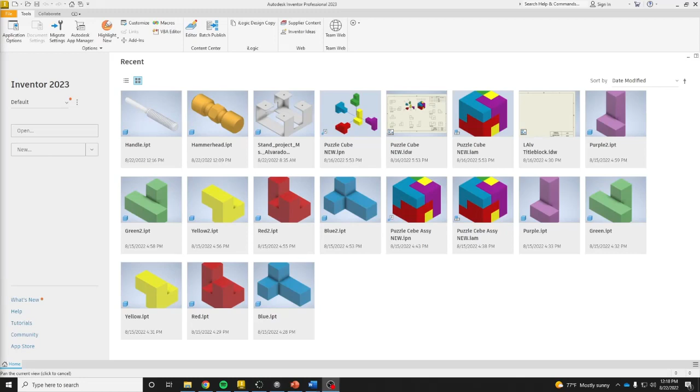Okay guys, in this video I'm going to show you how to create a two-part brass hammer. This hammer is going to be in the regular English system, so let's go to New and click on Standard IPT. From here, we are going to be creating our first sketch on the XY plane.

If we look at the original drawings, we'll notice that this is a symmetrical piece. So since this is a symmetrical piece, we're only going to be drawing half of it.

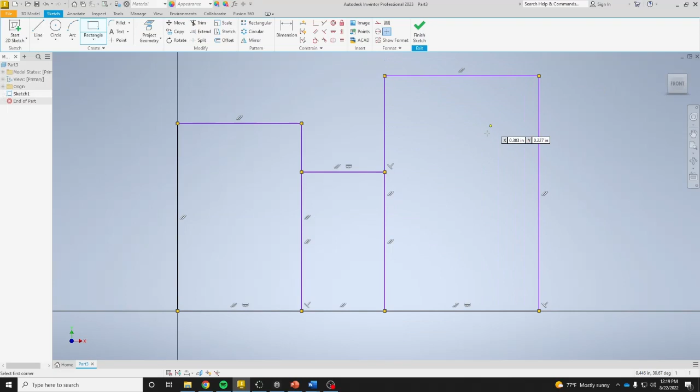I'm first going to be creating three rectangles: 1, 2, and 3. Now I didn't connect them other than at the bottom points. The reason why I did not connect them is because they are all at different heights.

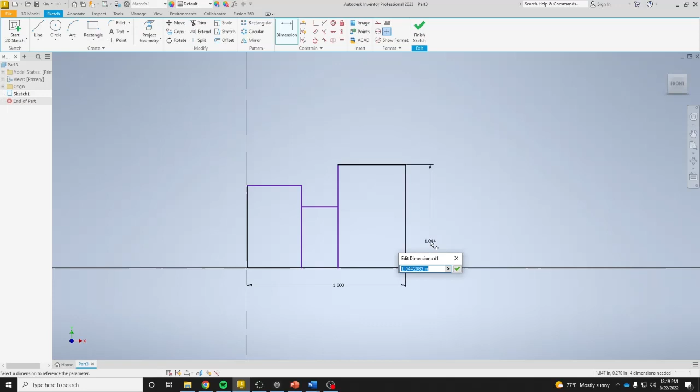The first thing I need to do is dimension the overall width from left to right, or in this case from center to right, which is 1.6. This rectangle on the outside has a diameter of 1 inch, but since we are going to be making a revolution, we're going to divide that in half, giving us 0.5.

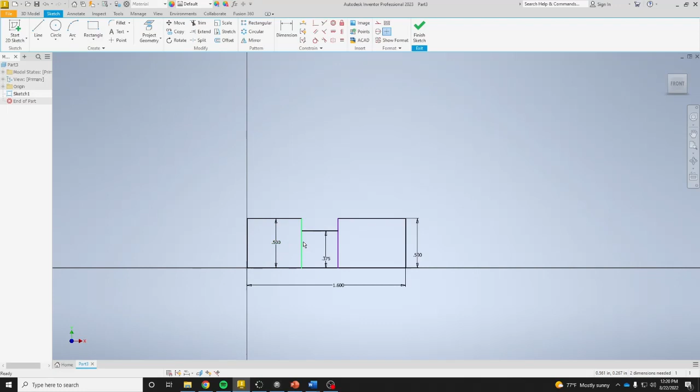This middle rectangle is 0.75 divided by 2, which gives us 0.375. And this section right here I'm going to put at 0.5. Now I know in the drawings you might see this as 0.85, but this is a hexagon, and I will be changing this revolution into a hexagon later, so I'll get to that in a bit.

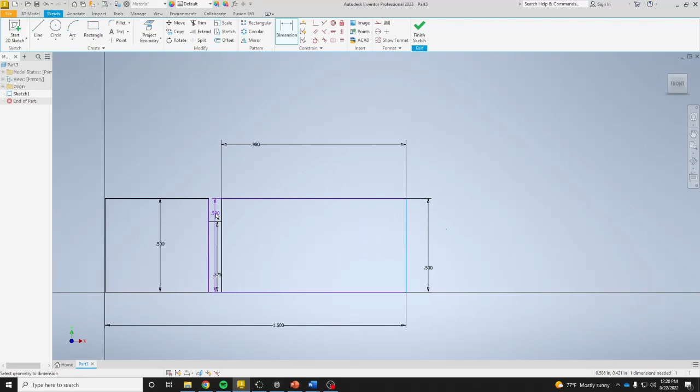Let's go ahead and add our final dimensions from this furthest edge on the outside to this section right here. This is 0.98. And then from here to this edge, this is 1.26.

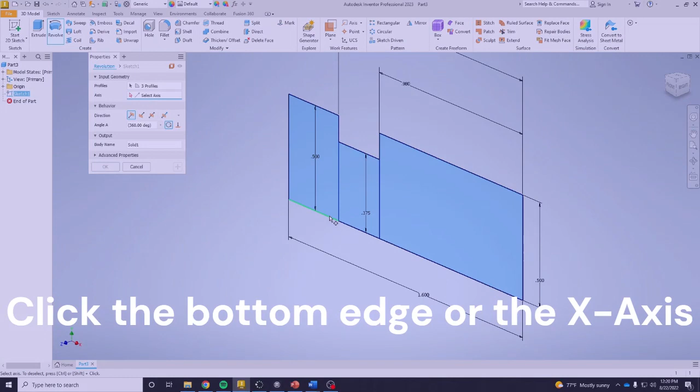Once you have this, go ahead and finish your sketch, and we are going to be revolving. So select all three of your profiles, all three rectangles. Go to Select Axis, click there, and we are going to select this bottom line, and it gives us our revolution.

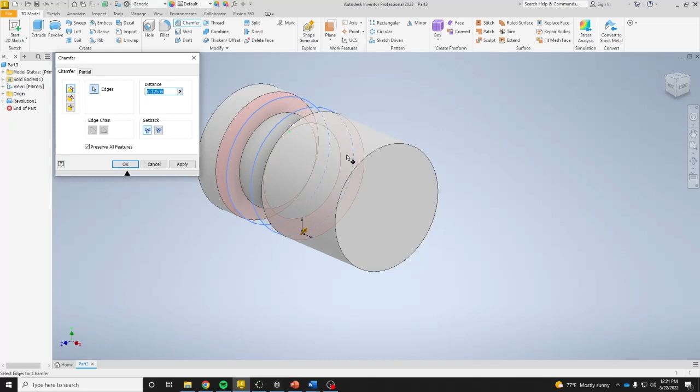Now once you have that, we are going to be adding some chamfers. The chamfers are at 45 degrees and have a depth, or distance, of 0.125. The chamfers go here, here, and here. Go ahead and say OK, and we're almost done with this part.

This section right here should be a hexagon shape, so I'm going to turn to my left side view, and I'm going to create a sketch right here.

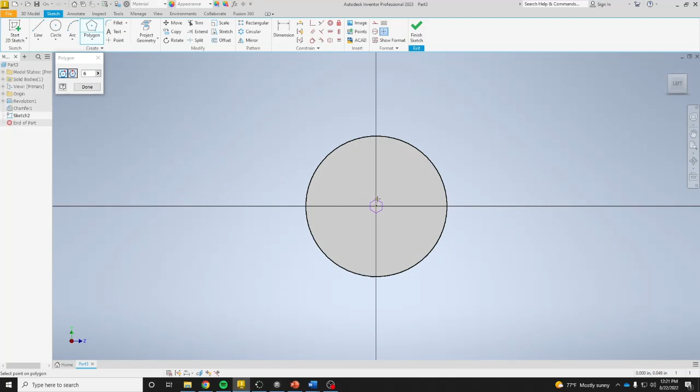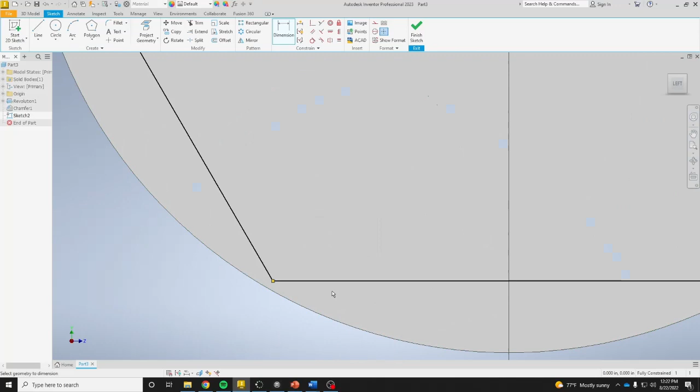Rectangle pull-down menu, and select polygon. From here, I'm going to select the center point, and pull it out to make a polygon, or in this case a hexagon, that is larger than my actual object. I'm going to use my horizontal constraint to make sure this top edge stays flat and horizontal, and that from my top edge to my bottom edge this is 0.85. As you'll notice, all of the points are on the inside of my circle, and that's exactly what I want.

I'm now going to create a regular circle that is larger than everything else, because I'm going to cut out the outside of my hexagon, so that I'm left with just this inner part that is hexagon shaped.

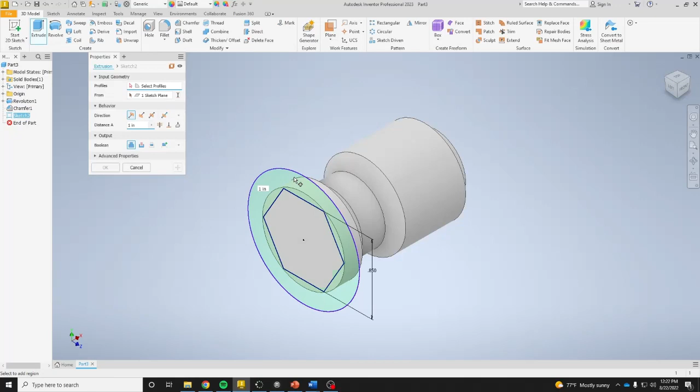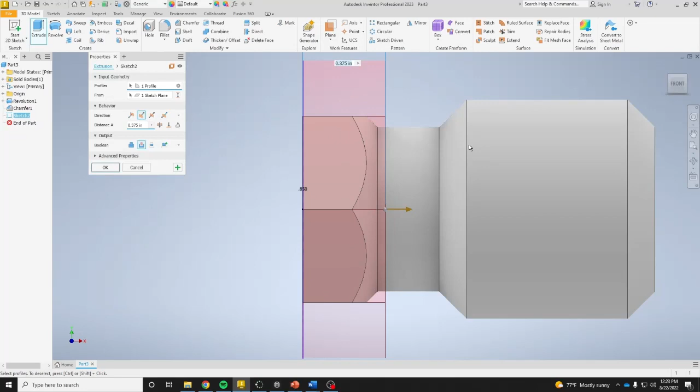So go ahead and do that, and we're going to change the direction of our cut this way. I'm going to look at my front view, grab this arrowhead, and pull it back. As long as you are cutting off more than the hex area here and less than this area here, that's all you need to do.

So once you have that, take a look at it isometrically. This is what you should be left with.

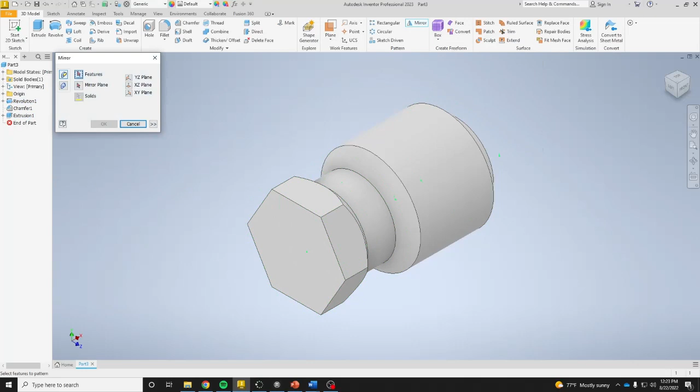Now I did say that this is a symmetrical part, so I'm going to rotate it. I'm going to use my mirror pattern function, and select in the browser bar my revolution, my chamfer, and my extrusion. For my mirror plane, I'm just going to select this part, this face right here, and it shows me a preview of what my mirrored object would look like.

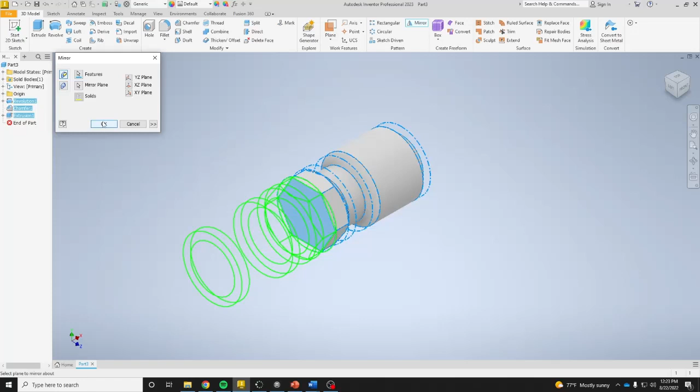Okay, this part is almost done. The last thing I need to add is a hole for the hammer handle to connect to.

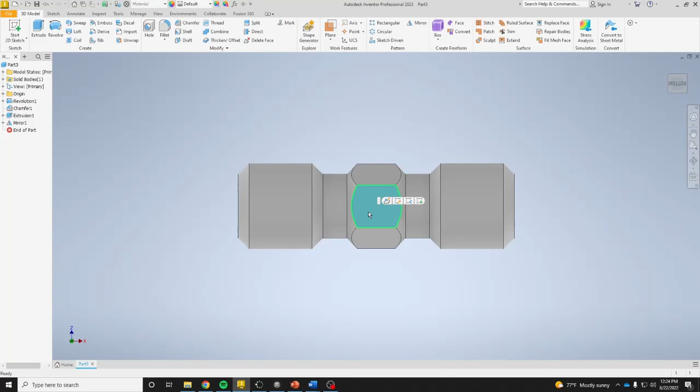So I'm going to go to my view cube and look at the bottom edge or bottom face. I'm going to click here and create a sketch. From here, I'm going to click on point and place that point right in the center of my object. That's all I need to do, and I'm going to click Finish Sketch.

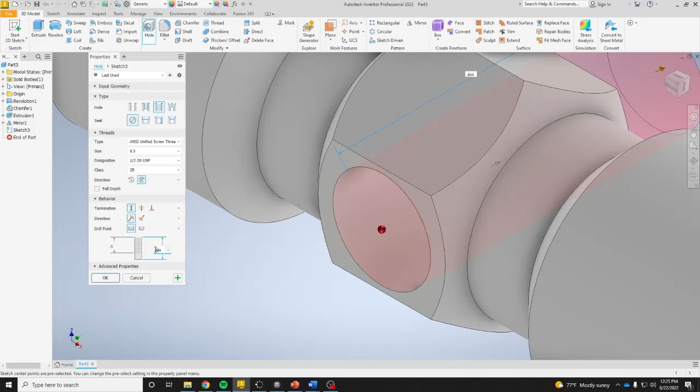I now need to add a hole, so I'm going to click on Hole, and make sure that this hole is a threaded hole with no seat. My threaded hole size is going to be 0.5, so I'll scroll down and find 1/2 20 UNF. Once you have that, enter in the thread depth, which is 0.5, and my actual hole depth is going to be 0.625. Once you have that, say OK, rotate it, and there is our final part.

I just need to change this from the generic material that it is over into brass soft yellow. Once you have that, you can go ahead and save it.

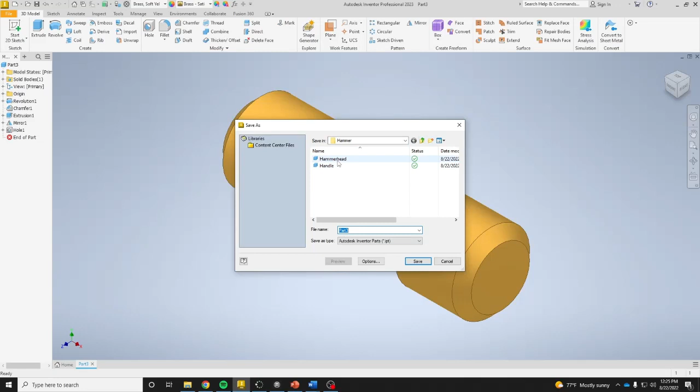I have created a new hammer folder, and in there I have my hammer head, and now I'm going to create my hammer handle.

So go to New and select a standard IPT. The hammer handle is relatively simple, and we're going to be starting on the XY plane. From here, we're going to create two rectangles, a rectangle here and a rectangle here.

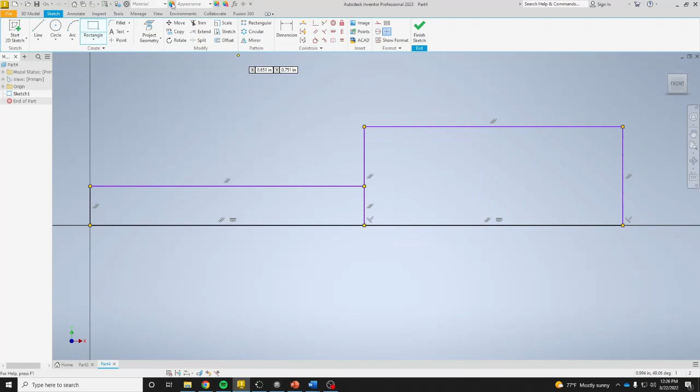I'm going to be adding my dimensions from left to right. This hammer handle is 6.98 inches long. The grip is going to be 3.883.

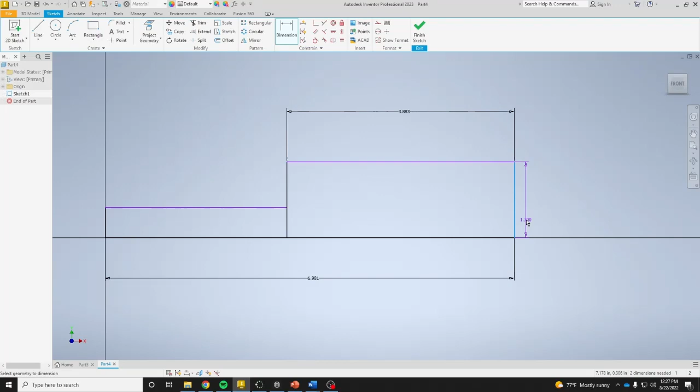Once you have that, then we're going to add our diameters. Remember that we are creating a revolution, so we only have to enter in half of our diameters. The diameter of our handle grip is 0.85, and we are dividing that by 2. And the shaft where the hammer head attaches to is going to be 0.259.

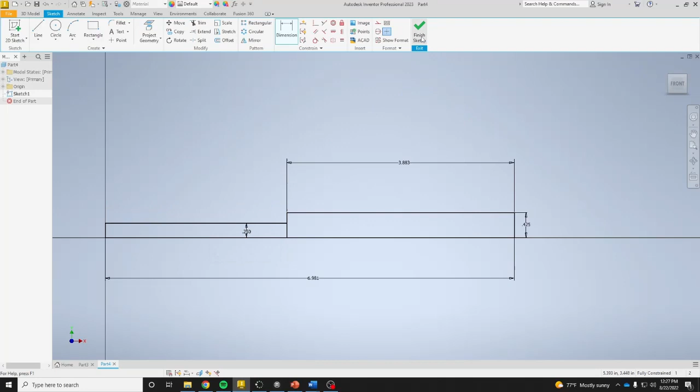Once you have that, finish your sketch, and we are going to revolve. Select both rectangles, and your axis is going to be that bottom edge, and say OK.

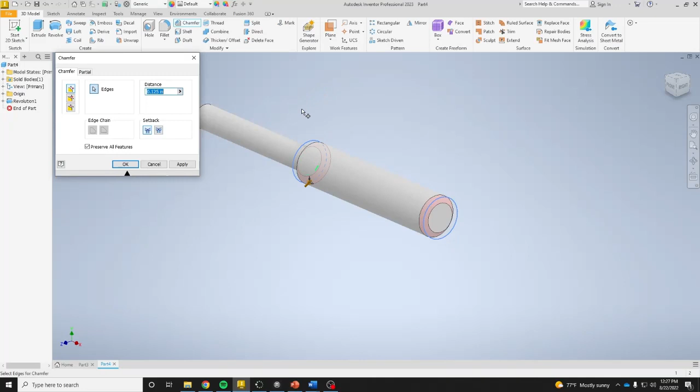Now that you have this, we are just going to add plain chamfers to here and here. Select Apply. Once you have that, we're going to add another chamfer, but this chamfer is going to be 0.035, and say OK. So we now have 3 chamfered edges, and we are almost done.

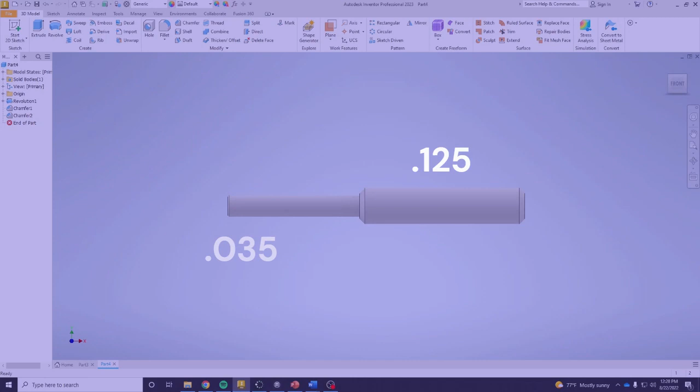Now we need to add the grip. We are going to be creating a new sketch right in the middle of this plane, or right in the middle of this hammer. So we need to go to the plus sign next to origin and choose our XY plane.

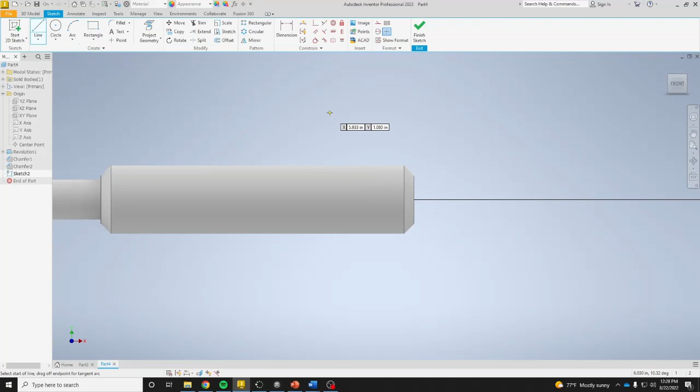I'm going to be creating a triangular cutout. So all I need to do is draw a triangle. Doesn't matter the size, as long as it looks like this. I'm going to use my vertical constraint to lock the point of my triangle to the center point of the flat edge of the triangle. And I'm going to dimension my triangle angle to be 60 degrees.

Once you have that, we can now go ahead and add dimensions of where this triangle is going to be located. 0.292 from the outside edge to this point, this is going to be 0.292. If your triangle does something like this, all you have to do is just drag it up, find the end, and drag it up, and you'll be okay.

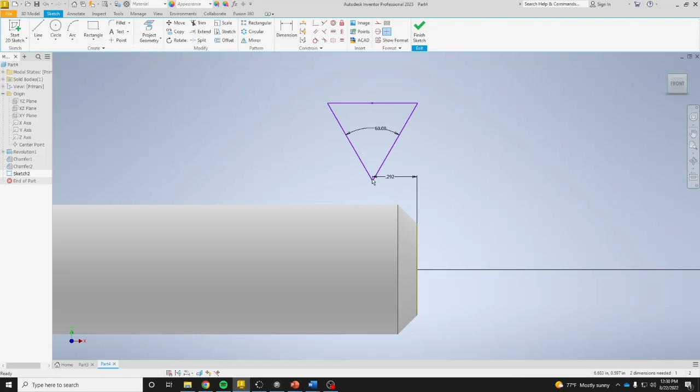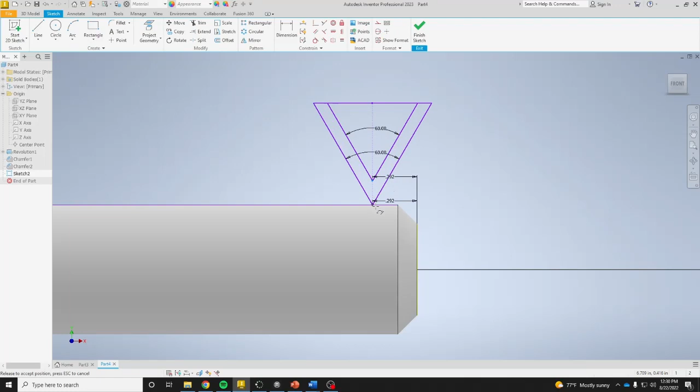The next thing we have to do is show where this point connects to the inside of this grip. Before we can do that, we have to use Project Geometry. So I'm going to click Project Geometry and select this top line. Right click and say OK. I'm going to grab the bottom of my triangle and move it below that yellow line that we created. Next, I'm going to dimension its depth.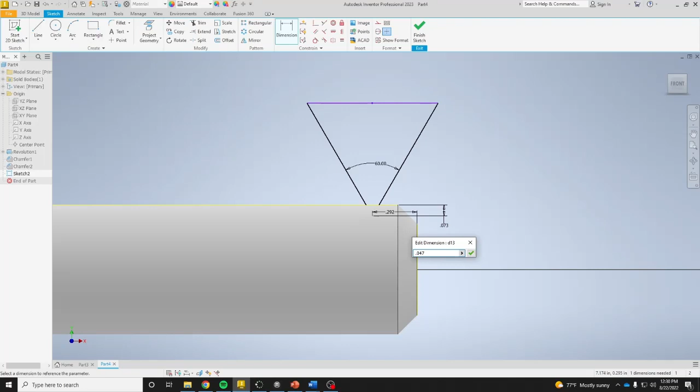All I have to do is find where that point is and add the dimension of 0.047. Once you have that, go ahead and finish your sketch.

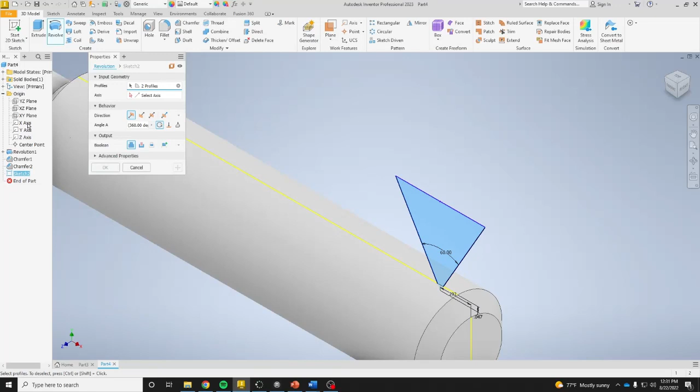We are going to be revolving this cutout, so I'm going to make sure that I select my entire triangle with the point included, and we are revolving around the x-axis. Now instead of adding this, we're going to be cutting it away so that we end up with something that looks like this right here.

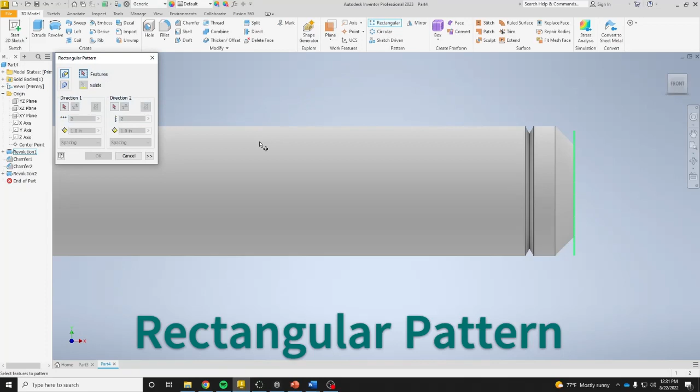We are now going to use our rectangular pattern. So click on rectangular pattern, choose revolution 2. The direction is going to be the x-axis. If we look, it's going to send it in the positive x direction. We want to flip it so it's going into the actual hammer handle. We are repeating this pattern 20 times with a spacing of 0.173.

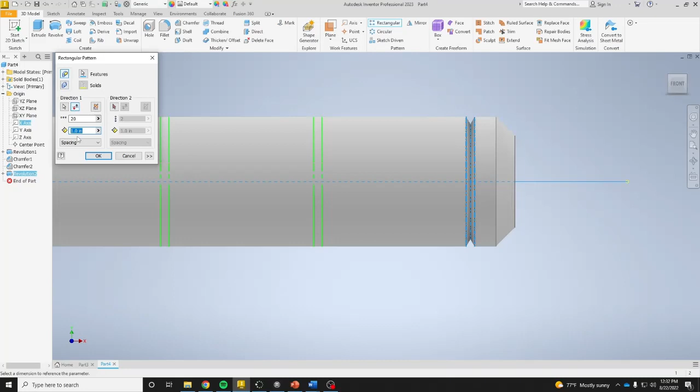You can go ahead and look at the preview of what is going to happen. If you're satisfied, go ahead and click OK. And we are almost done.

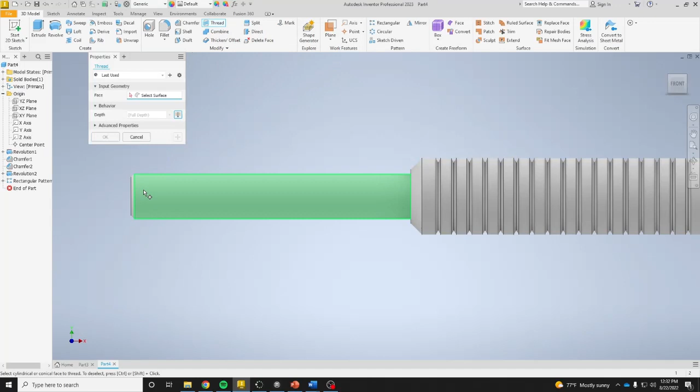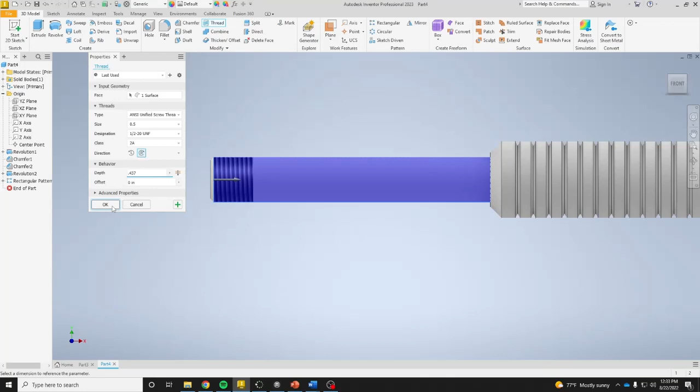The last thing we need to do is add some thread. So we're going to select the thread function and select this shaft right here. We are not threading the entire shaft, all we are selecting is 0.437 of this shaft. Make sure that your thread reads 1/2 20 UNF. Once it says that, select OK, and we are finished with this.

We just need to change the material from generic to aluminum 6061. Once you have that, go ahead and save this as the handle.

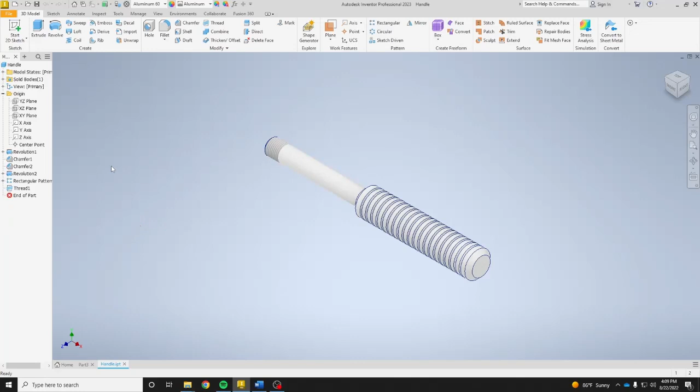So now that we have created both pieces, let's go ahead and create an assembly. Go to New and select Standard IAM. When you get there, click on Place. Make sure that you go to your hammer folder and select the hammer handle as the first part that you bring in.

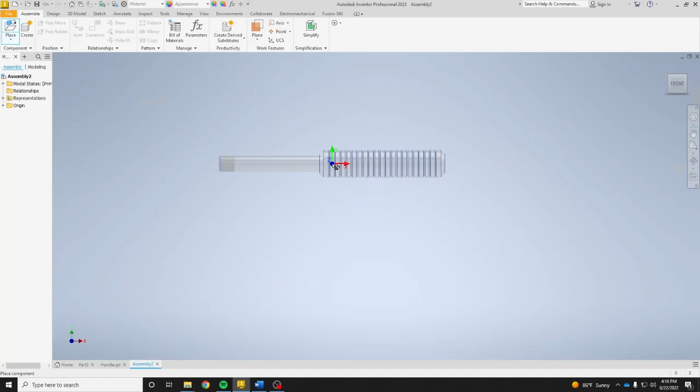When you bring it in, make sure that you right-click and click Place Grounded at Origin. This will keep all of your parts from moving in the future. Right-click and say OK, and let's go ahead and place our hammer head. Go ahead and click Open, and we are just going to place it right here and click OK.

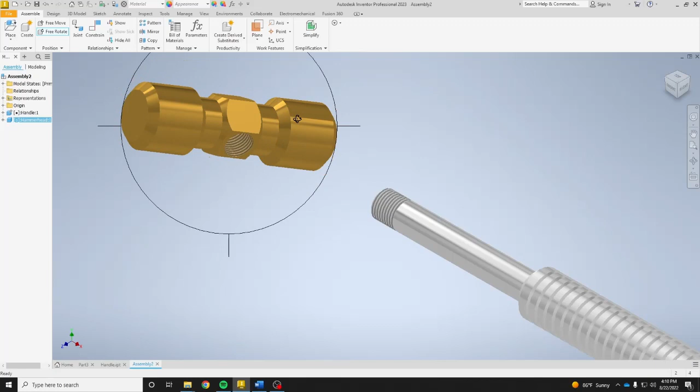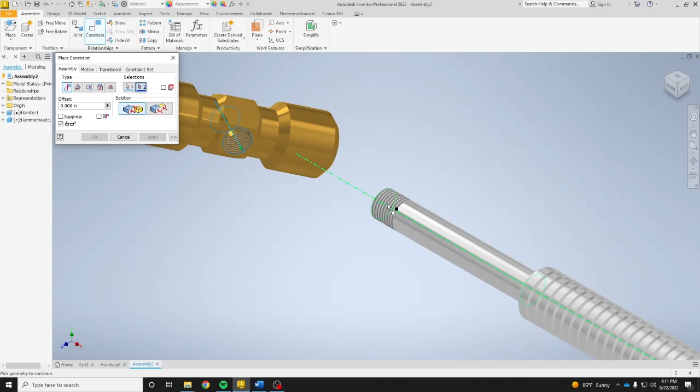We now want to connect our hammer head to our handle, so we're going to rotate our part so that we can see the hole that is threaded on the hammer head. Once you have it rotated in this position, go ahead and click on the Constrain button and find the center line of the hole on our hammer head and select the shaft of our hammer handle. Click Apply and then Cancel.

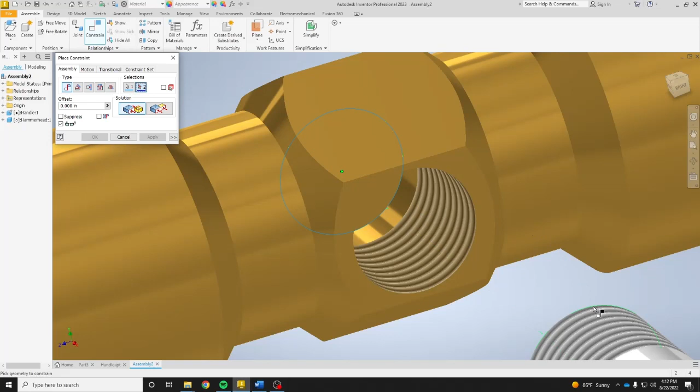We're going to pull this out so that way we can make sure that this is correctly placed. Then we're going to rotate our view so we can see the inside of our hole, and we're going to constrain this inner circle of the hole, and we're going to constrain this outer circle of our handle where the threaded part ends, and they are now fully connected. Click Apply and then Cancel.

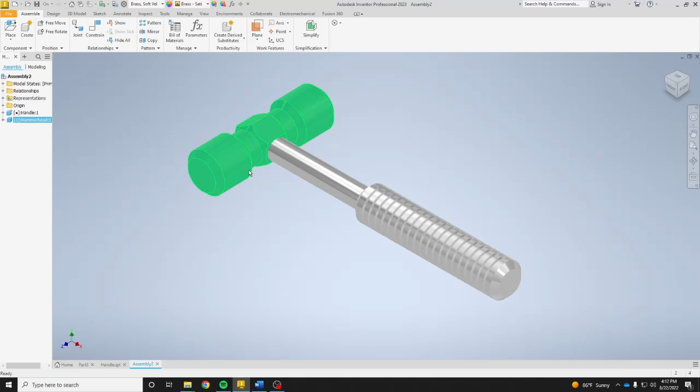As you'll notice, this can spin, but that's fine as long as it's placed in this general position. This is fine. Go ahead and save this as assembly or hammer assembly.

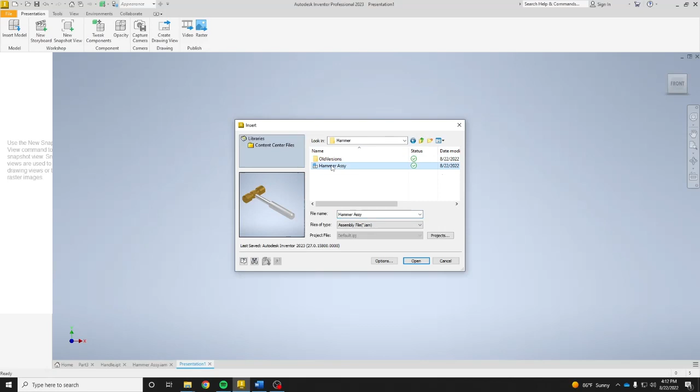All right, let's go ahead and create our exploded view. So go to New and select Standard IPN. Bring in our hammer assembly, and now we're going to tweak our components.

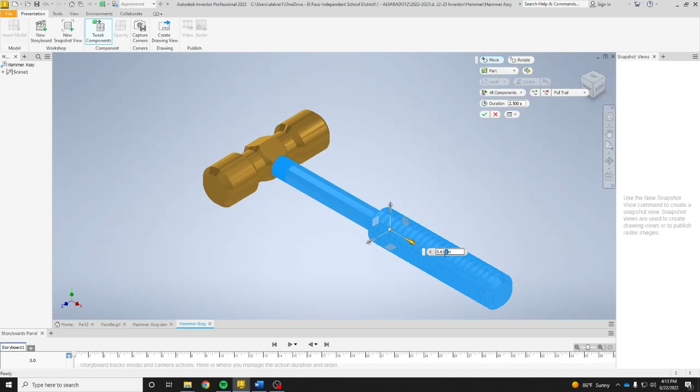The only component that we really need to tweak is our hammer handle. So I'm going to click on the hammer handle, grab this arrow right here, and move it. It's moving in our X direction, so I'm going to go ahead and say that I'm moving it 2 inches away. Click and hit enter, and that is it.

You can play it so you can see what's happening, or you can play it in reverse to see it go together. Either way, just go ahead and save this. This is our hammer assembly IPN. And now we can go ahead and place this on our title block.

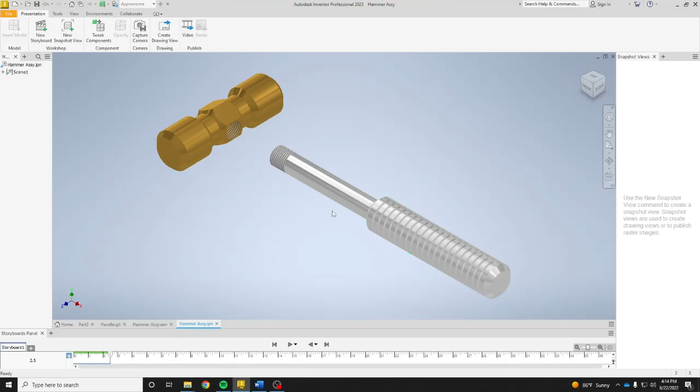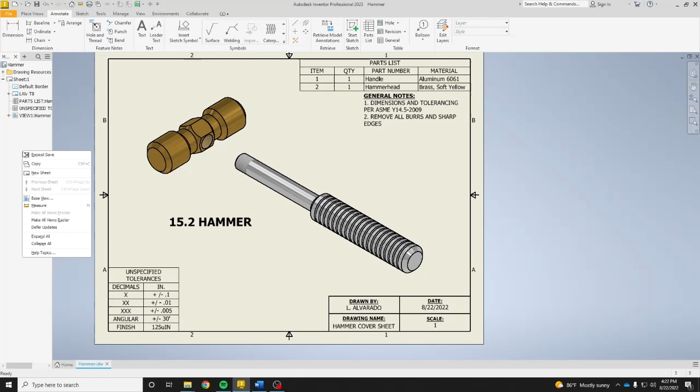Let's go ahead and add our second sheet. Our second sheet will have the dimensions that we need for everything. So go ahead and click right here in the browser bar and click on New Sheet.

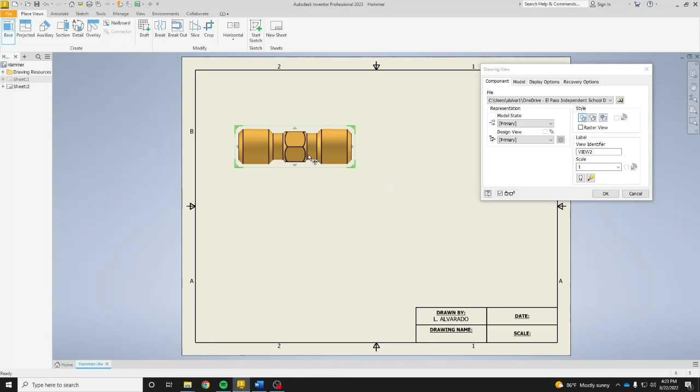The new sheet will have both pieces, so let's go ahead and place our base. In this case, we're going to use the hammerhead first because that is what we created first. And I want to make sure that it kind of fits right here. I don't want to have it shaded. I want to make sure that it is at 1:1. And I want to have a side view and a top view. And say OK. The reason why I added the top view is because we do have that hole that I want to go ahead and dimension.

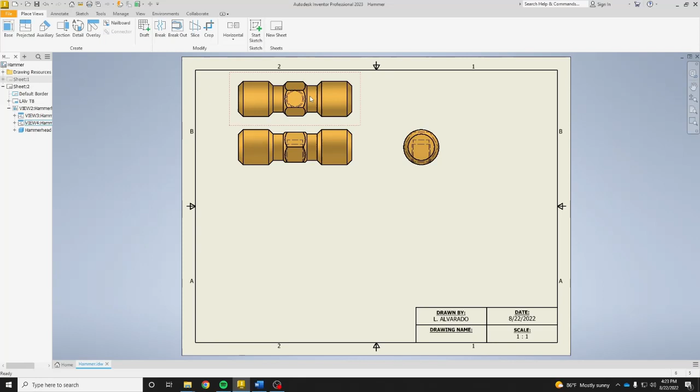The next thing that we need to add is our hammer handle, and it can fit at the 1:1 scale with a front view and a side view.

All right. The next thing that I'm going to add are my labels. I'm going to put a label right here, and this is going to say hammer head. I'm going to bold and underline this. Then I'm going to click here, copy, and paste it. So that way I have it right here under my hammer handle.

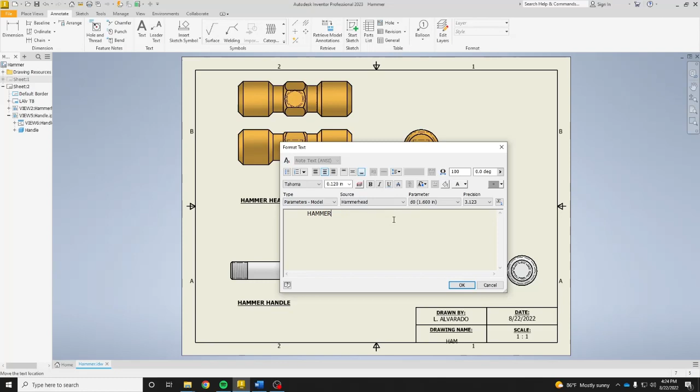And I'm going to say hammer handle. And say OK. I then need to copy or paste again and put this right here. And I'm just going to make sure that I'm positioned in the right location. And I'm just going to say hammer parts and say OK. And then just readjust the location.

The next thing that needs to be done is the dimensioning. General dimensioning is pretty simple, so that'll be your responsibility. The only thing that I'm going to show you is how to add the information for the threads.

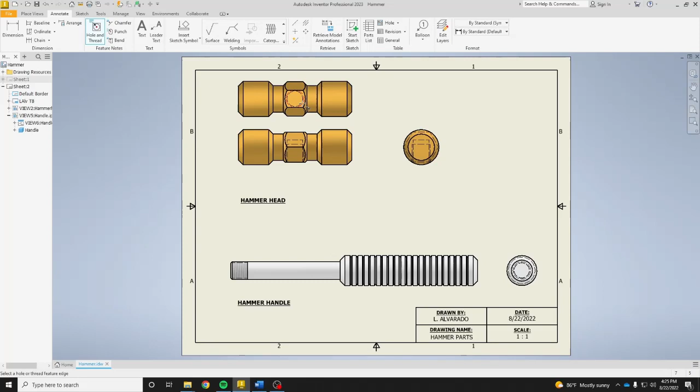So to add thread information, you're going to click on Hole and Thread Notes. Where you see any thread, in this case we have the hammer head has threading, so I'm just going to click there, and the hammer handle has threading right there. Once you have those two things, you can move on to the next feature.

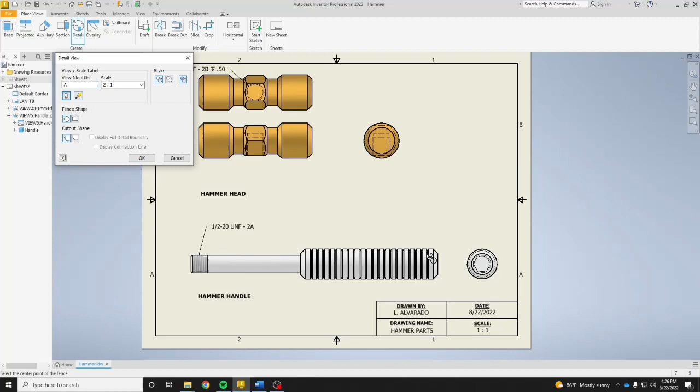The next feature is that we need to section or show a detail view of this right here of how we created these V notches. So go to Place Views and select Detail. We want to select this corner, and we don't want to have the view label on, so we're going to click on Toggle Label Visibility. I'm going to click here and make a circle about this big, and then move it up here where there's nothing in the way.

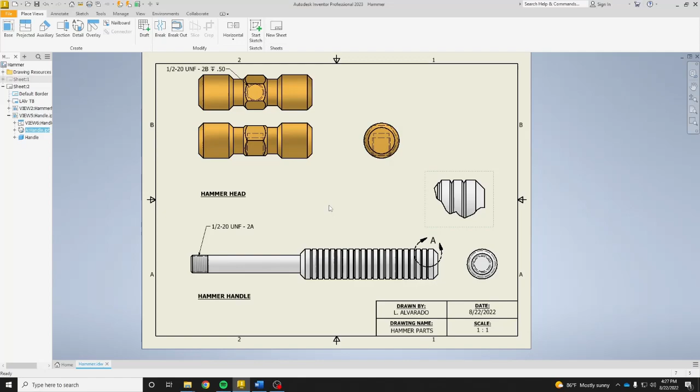And this will show all of the information that I need. It is up to you guys to go ahead and add the rest of the information and the rest of the dimensions all on your own. If you guys have any questions, please let me know, and I'll see you guys in the next video.